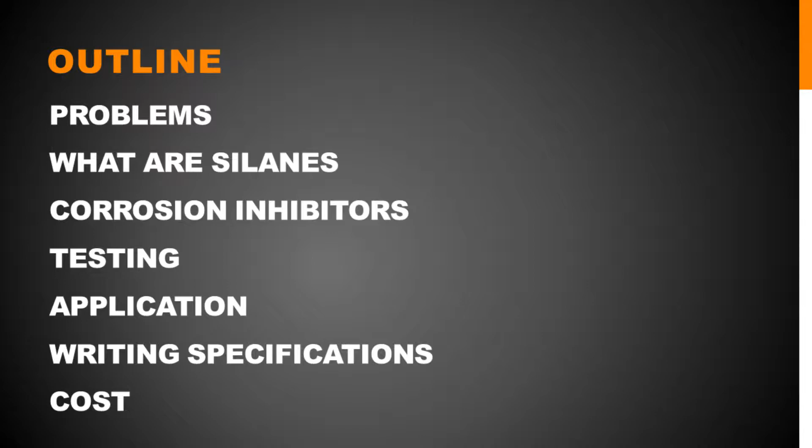What we're going to talk about is the problems, which is typically water. We're going to go a little bit over what silanes are, a little bit in the chemistry of them, a little bit about the difference between them. We've already covered corrosion inhibitors just a second ago. It was great. We'll talk about the testing and how long these have been tested. They're still today being tested. Application techniques, writing specifications, and then the cost.

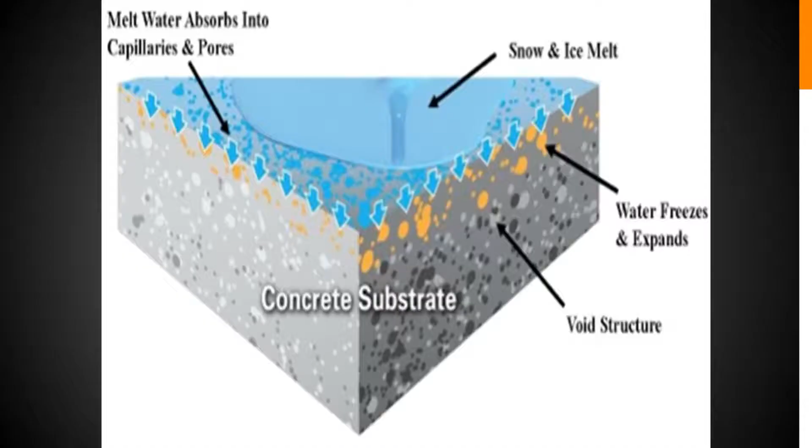Water's a real enemy here. You put chlorides on your bridge decks, then it rains, and then the chlorides soak into the concrete, your rebar starts corroding, and we've been talking about that all day long about corrosion and rebar. So if we can keep the water out of the concrete, we protect that rebar. So a lot of these things you see every day, freeze-thaw damage, spalling, scaling, cracking, ASR. Is ASR a problem out here in the West?

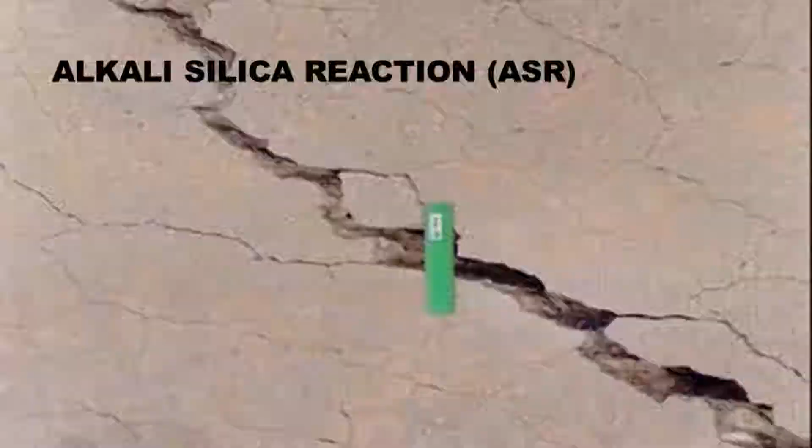Kind of? Okay. ASR, I know one of the projects in Arkansas a few years ago, the runway at Fayetteville, they kept pushing the asphalt at the end of the runway. And so they kept trying to figure out what was going on. So the runway, when it was poured, was 3,000 feet. A few years later, it was 3,005 feet. Well, at the same time, Arkansas had poured 28 miles of interstate with that same pour. It was a real problem. So they put silane on that entire roadway to mitigate that problem. So if you don't have ASR problems, thank goodness for that.

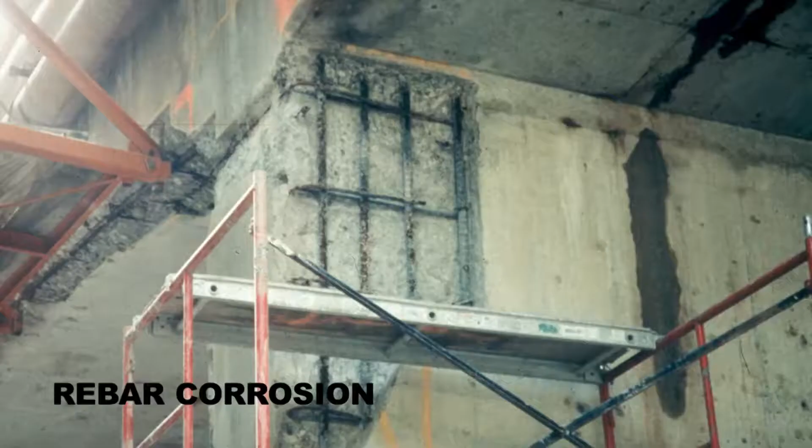This is what I see when I go around the country a lot. The decks, we do a lot of work on the decks. It's the glamour. But then when you get to the substructure, this is what I see everywhere. Does this look familiar to anybody? Yeah. This could be easily prevented by using silane on the substructures. We spend all this time on bridge decks and neglect the substructures, and this is a problem. I mean, it's a problem in Oklahoma.

It's a problem in New York and Maine. I see it everywhere I travel, the substructures not being treated, not being taken care of, and now you got rebar sticking out of there. And now you got to fix it when it could have been easily prevented. I like to see maintenance crews do these kinds of things. Silanes are one of those things that maintenance crews can do quite easily.

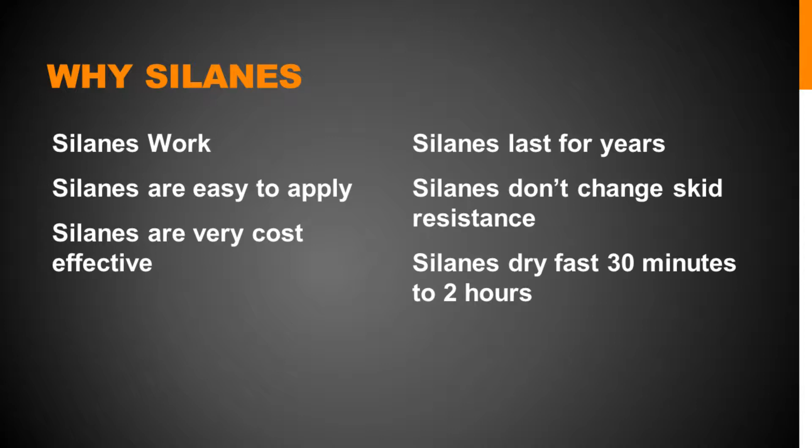Why silanes? They work. They're super easy to apply. You're going to see in a minute that it's extremely cost effective. They last for years. I'm going to go through that Oklahoma State study that we talked about. It doesn't change the skid resistance, and they dry fast. Some silanes will dry in 30 minutes to 2 hours. So it just depends on how you write your specifications, what you allow in there, what the dry times of those are.

From hydrophilic to hydrophobic. Concrete loves water, right? It'll drink it in. If you've been out by my booth, you see a waterfall out there, and you just see that piece of concrete soaking in that water. And so they soak it in. So if there's chlorides on there, it's going in. It has nowhere to go. Silanes, as Atris talked about, form that covalent bond with the silica in there.

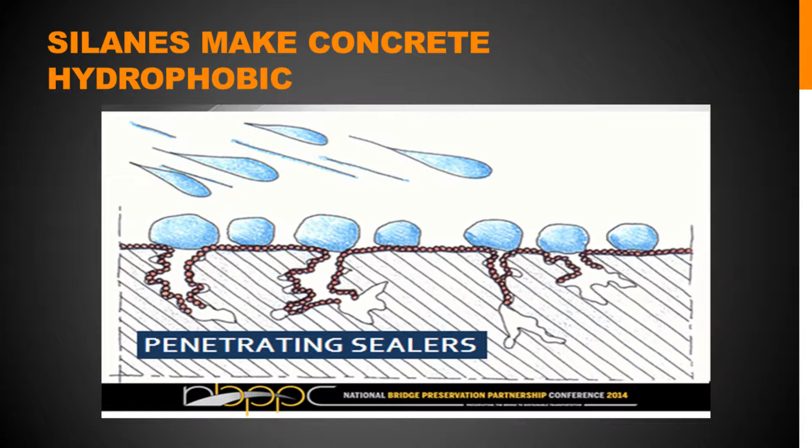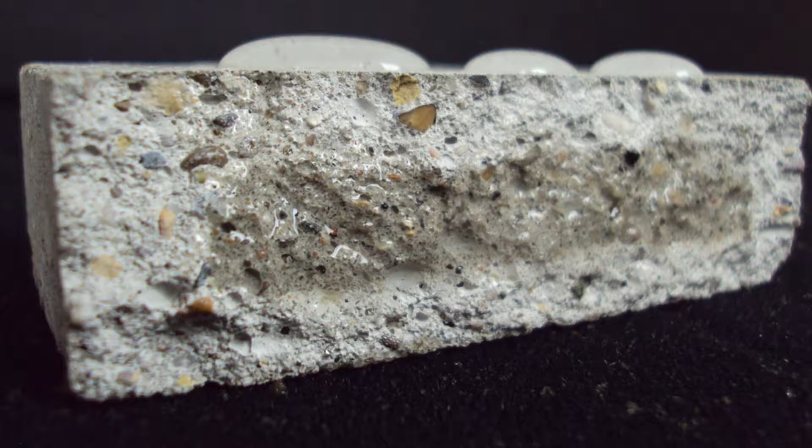It makes them hydrophobic. This is loose sand. That demo is out there. You can take loose sand, coat it and saturate it with silane, let it dry out, and the water will not penetrate through there. This kind of shows you that depth of penetration that you get with silanes. This block was dipped in silane, and you can just see that the water just stays out of there. It cannot penetrate through there.

Talk a little bit about the difference, not to talk a whole lot about the chemistry of these, but typically there's about six silanes that are commonly sold into this industry. These all have great names, but typically there's isobutyls. This is that first word there. So there's isobutyls, N-octyls, and isooctyls. And then you have trimethoxy and triethoxy after that.

All these silanes perform basically the same. They all penetrate the concrete. They all make it hydrophobic. The biggest difference in all these silanes is the dry time. So when someone comes up and says, my silane is better than your silane, that's just not the case. It's kind of like the spread rate, which we're going to talk about in a few minutes.

So the isobutyls are the fastest drying silanes out there. They dry the fastest. Then the N-octyls are the next fastest, and then the isooctyls. So under the isobutyls, the trimethoxy is the fastest silane out there. The isobutyl triethoxy is the next fastest.

To me, speed, I spent a whole lot of my life watching paint dry. Getting on a bridge and getting off that bridge is ultimately important because everybody likes to see their bridge closed for hours, correct? Yeah, no. So the whole deal is to get on there. So if you develop a silane program, I like to see faster dry silanes put in that spec just because you need to get on and off that bridge in a timely manner.

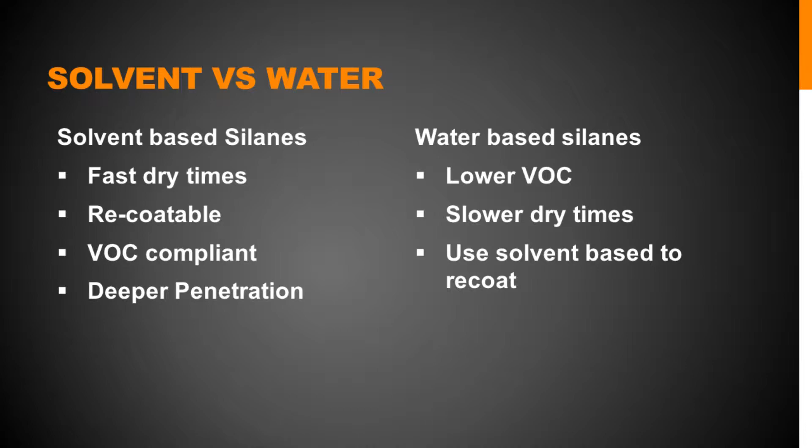And they're deeper penetration. When you're dealing with water-based, you can get lower VOCs, but now we're waiting for water to evaporate. The water's got to evaporate before that silane can really start penetrating in there, and they just don't get as deep penetration.

Silanes have been tested by everybody. Oklahoma started a silane study in 1976. They did the first bridge in the United States in 1977, which was the Bird Creek Bridge. All these DOTs are constantly testing it. Same with universities. Purdue University is doing a study. Nevada University did a study, and it's on the website now. I sent silanes to Kansas City last year. Because you apply it and then you can't see it, is it really there? Does it really work? It's a constant study.

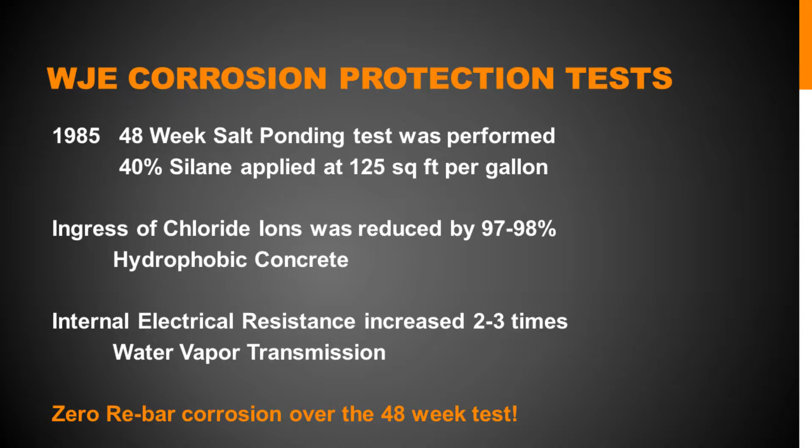This is a 1985 report from Wiss, Janney, Elstner. It looks like it was typed on an IBM Selectric typewriter. A 48-week corrosion study, and a 40% silane at 125 square feet per gallon passed the chloride intrusion test. They've been around a long time. It's a proven technology.

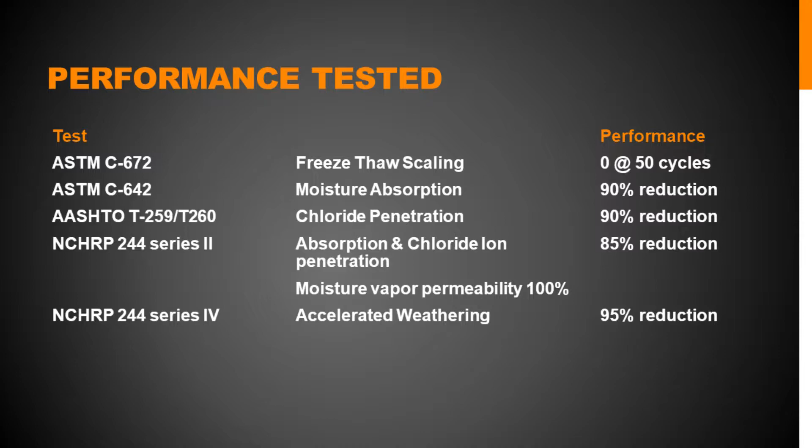So this is a way to test moisture absorption into concrete. Typically not done on bridge decks, but it's done all the time on vertical buildings and parking garages. So you putty this RILEM tube down, you fill it with water, and it determines how fast the water gets soaked in. You run this test on your structure prior to applying a silane. You let it cure for a few weeks, then you go back and rerun that test, and you can see the difference and monitor how much moisture is actually taken in.

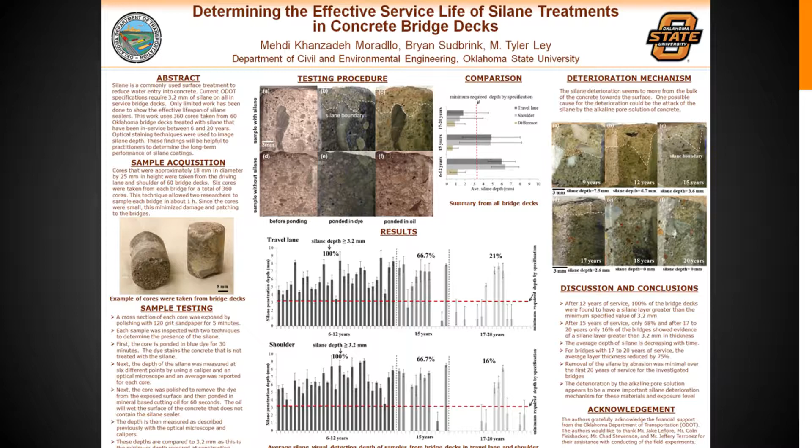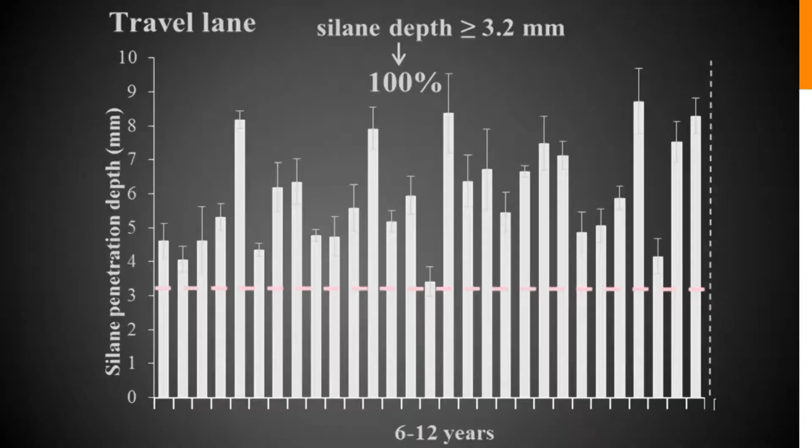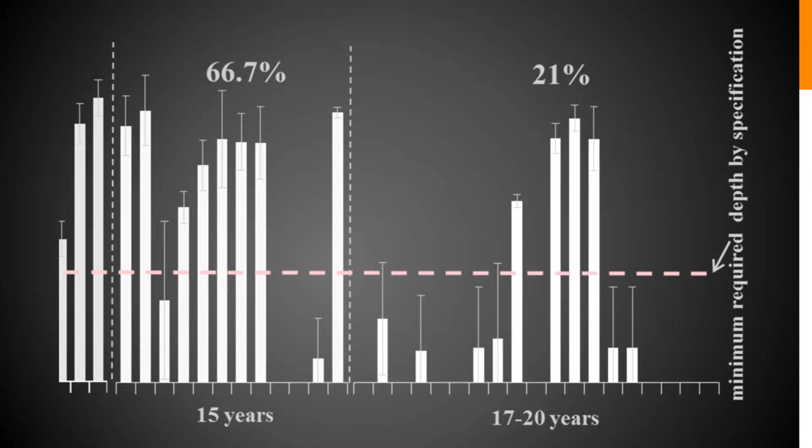So Oklahoma State University tested 60 bridges. They pulled cores from 60 bridges to do this study. And out of those bridges that were 6 to 12 years, 100% of them still showed silane in them. Bridges that were 15 years, 66% of them still showed the presence of silane, and bridges 17 to 20 years, 21%.

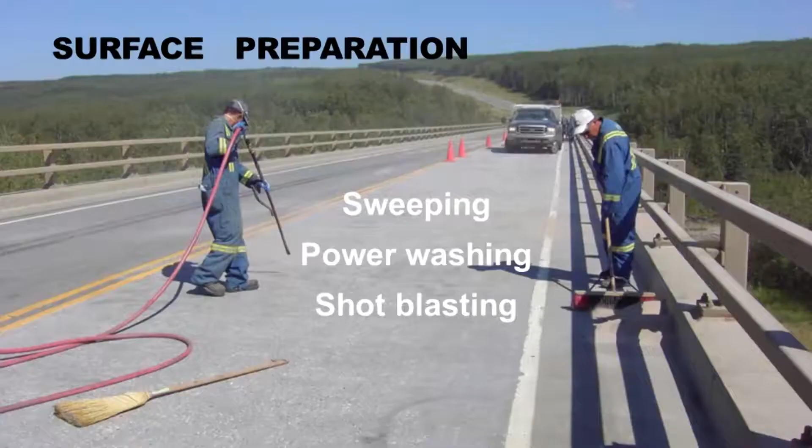So when someone asks how long do silanes last, according to Oklahoma State University, they last 6 to 12 years. So you can typically think that they're going to be in there for a good 10 years after you apply it. Talk a little bit about surface preparation and application techniques, because this, to me, is what's important for the people in this room about, okay, we're going to start a silane program. What does that look like?

A lot of states sweep their bridges. A lot of them just blow them off with an air knife. You can power wash them. If you have a washing and sealing type program, which a lot of states do now, they wash the bridges, but now you've got to wait a day or 2 days before you go back to treat them. The concrete needs to be dry to get maximum penetration.

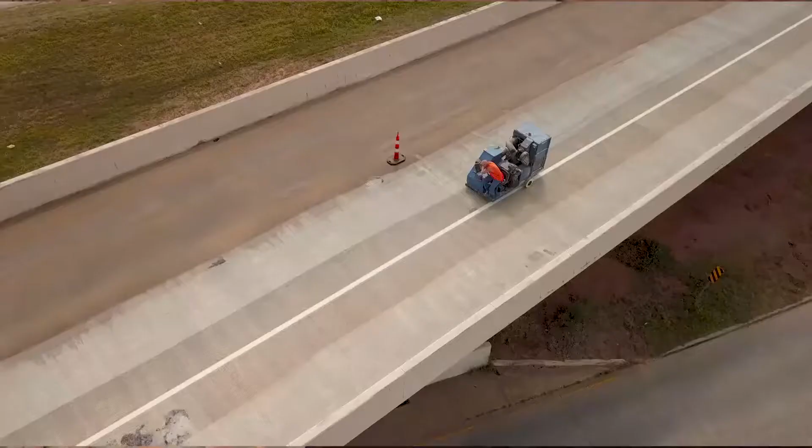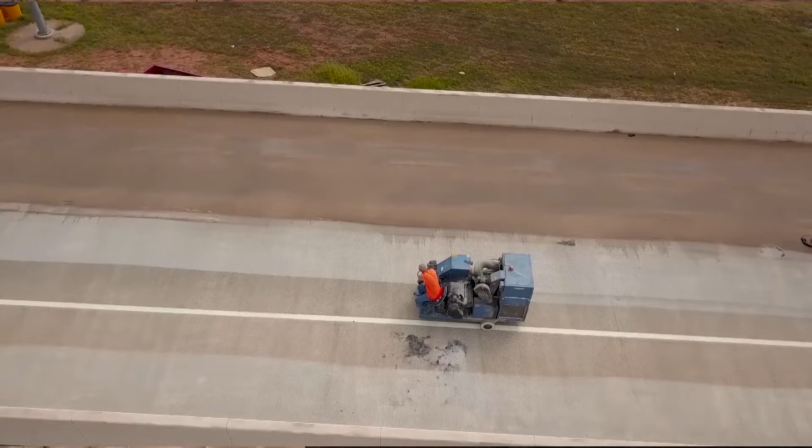So you can just see how clean that shot blaster gets it. It's not a super heavy, it's just a real light. It's more than a brush blast, but you definitely can remove everything out of that concrete. But Oklahoma is the only people that I know that does this. And Oklahoma is the only people that I know that core their bridges to pay their contractors.

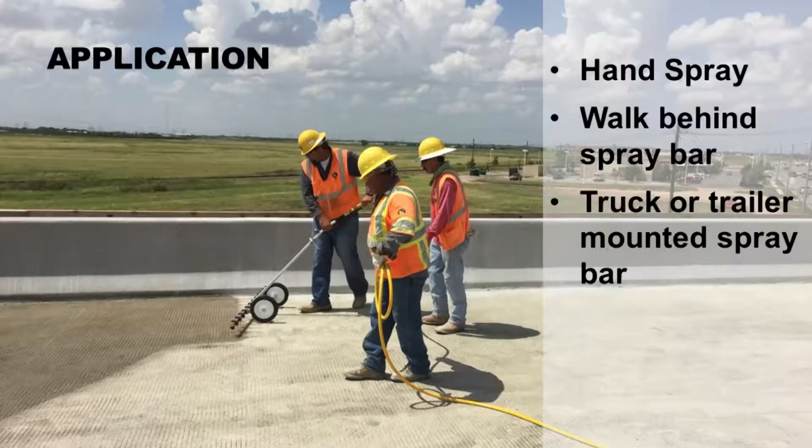Oklahoma pays their contractors two ways. They do visual inspection, which we put a dye in there, and then they can see what that looks like. Then the inspectors can tell that it's been sprayed, the fugitive dye, or they pull a core, and the contractor gets paid on depth of penetration and running a moisture absorption test. It's a tough test.

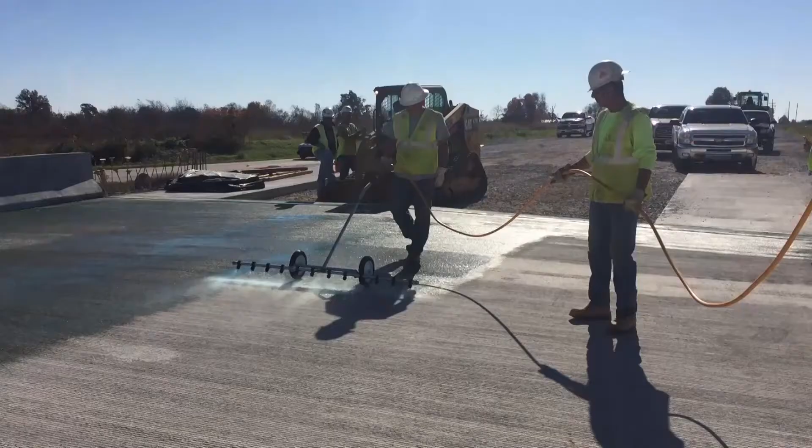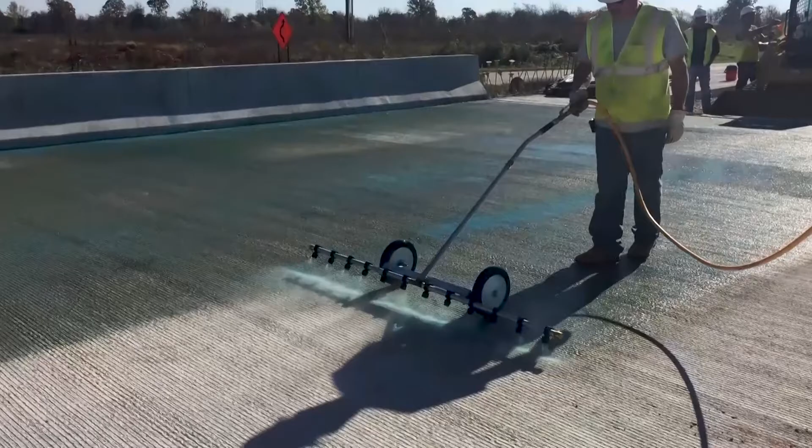As far as applying the silanes, I have a lot of states where contractors just hand spray it, walk behind spray bars, or truck or trailer mounted. The key to this is getting it close to the ground. You can see with this, they're kind of pushing that puddle. This is in Arkansas. This has the blue dye in there. They're applying this at 125 square feet per gallon. It's kind of pushing that puddle.

I like spray bars because it doesn't atomize. You do not want to atomize these. If you get too high a pressure of spray and you're atomizing these silanes, it's good for the silane manufacturer, not good for you. You're trying to get as much transfer efficiency as you can. So when that spray bar is that close to the ground, there's not much waste. This is a truck mounted unit. This is from Illinois. This is pretty close to the ground.

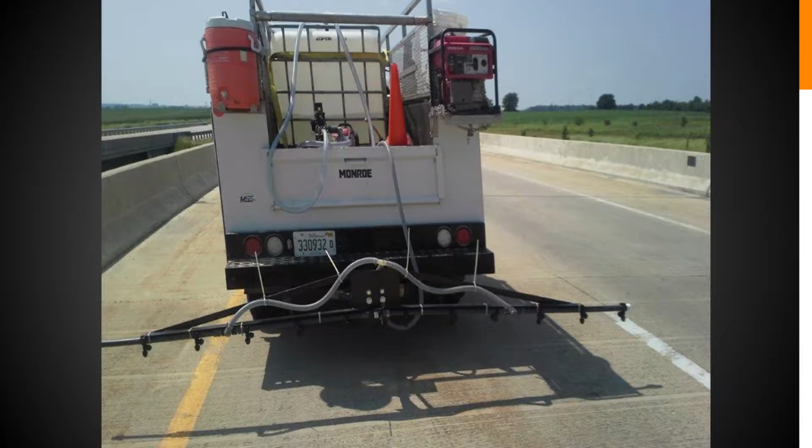Part of the problem with truck mounted units is if you're applying this at, say, 200 square feet per gallon, driving slow enough becomes a real issue. How do you drive it slow? If you're doing huge bridges, it's a great way to do it.

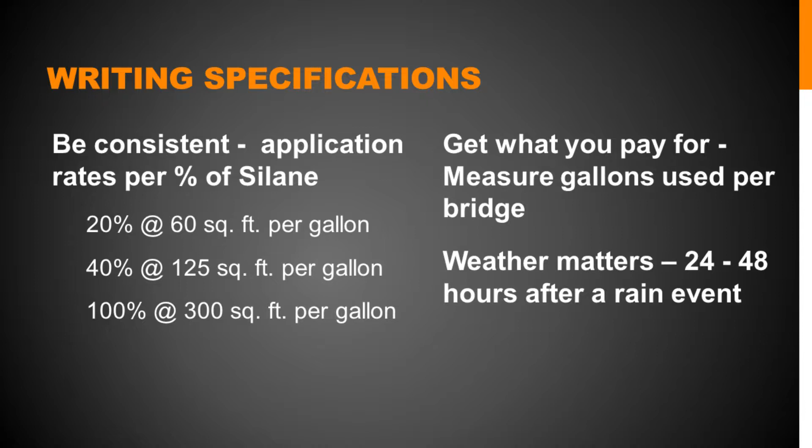Let's talk about writing a specification. Typically silanes, when we were talking about all those ASTM tests, those are typically run, let's say, on a 40% silane. Typically we like to see that written at 100 or 125 square feet per gallon. That gives you 11 grams of silane per square foot. That's about where the silanes need to be effective to keep the chlorides out.

So when you're writing a specification, if you're going to put a 20% silane in there, it needs to be at 60 square feet per gallon to get that 11 grams of silane per square foot. If you're going to write a 40% silane, it needs to be at 125 square feet per gallon, and 100% silanes need to be at 300 square feet per gallon. That's where you need to be.

A lot of times a specification will get written, manufacturer's recommended application rate. Guess what happens? My silane will go 600 square feet per gallon. And it will. But you don't get the protection that you need. That's what happens when we write specifications that say at manufacturer's recommended application rate. You don't get what you pay for. They're going to stretch it out. It happens every day all over this country.

If you ask me to come help you write a spec, this is how it'll be written. We're going to say, if you're going to use 100% silanes, we're going to put them down at 200 or 300 square feet per gallon. And that way you get what you pay for. And then when your inspectors are out there, they're going to say, this bridge deck is so big, this many gallons need to be put down. I want to see it out of that drum or out of that tote tank. I want to see that many gallons put on my bridge deck because that's what I paid for. So be consistent in writing specs.

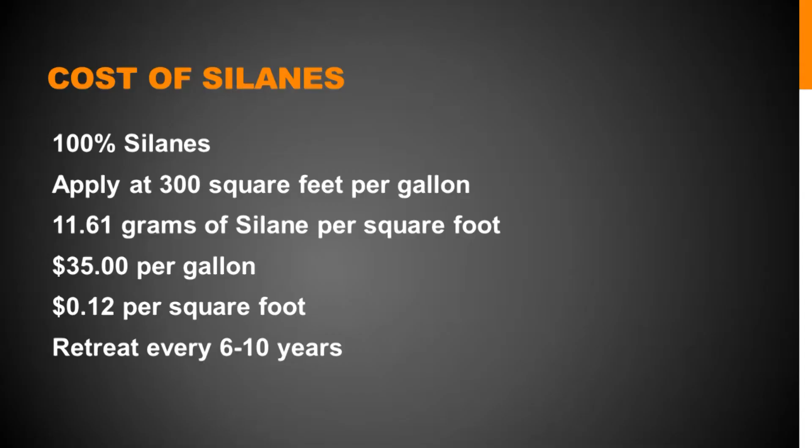40% silanes, 125 square feet per gallon, $20 a gallon. You're at 16 cents a foot. Here's the moneymaker for you guys. 100% silanes at 300 square feet gives us 11 grams. Now you're down to 12 cents a foot cost. 12 cents a foot to prevent corrosion. Pretty inexpensive. Now the question should be, why is it getting cheaper as that silane goes up?

Every time that we have to touch that in manufacturing, that cost goes up. So the 100% silanes are basically the raw material for making the 40s and the 20s. We have to take it out of those tote tanks or out of the container. We have to blend expensive solvents in there. Then we have to re-QC it. Then we have to repackage it. So that's just that many more people that have to touch that. And with that application rate, you're basically paying to ship solvent across the country. So that's why the best bang for your buck is to go to 100% silanes.

Let's look at a typical bridge. So if you've got a 150 by 38 foot bridge, it costs you $140 a square foot.

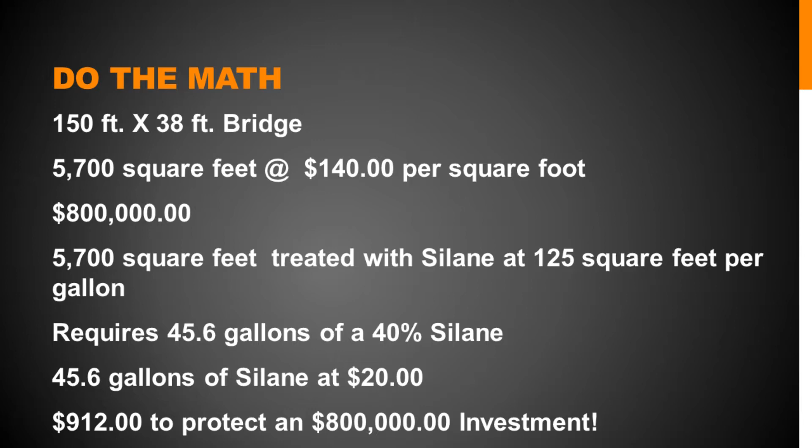When I wrote this, that was probably a pretty good number. It's probably higher than that today. That bridge costs you $800,000 to build. So 5,700 square feet treated with a 40% silane, 45 gallons. So that 45 gallons at $20, $912 to protect an $800,000 investment.

If you had an $800,000 car, would you change the oil in it? Even if it cost you $900? The answer is yeah. You probably would, because you want to protect that investment. Silanes are one of those things that truly protects your investment when you're building these new bridges. It's too easy to apply. It's too easy to use to not do it.

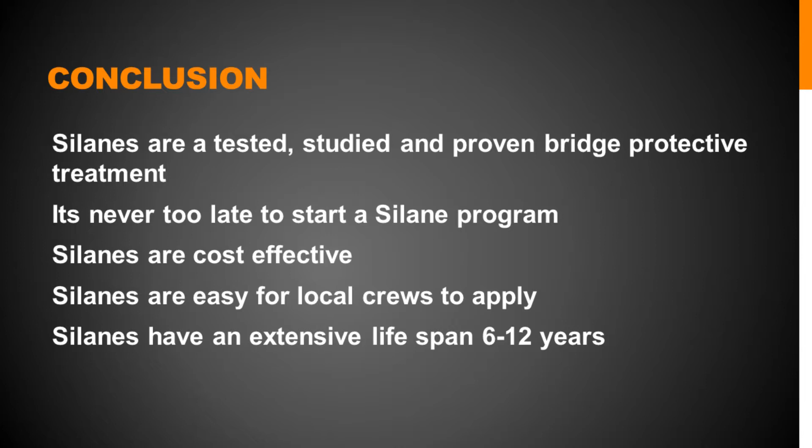They're tested. They've been studied. There's still studies going on this day to prove it. It's never too late to start a silane program. You just saw what the corrosion inhibitors do for reducing rebar corrosion. So it's never too late. If you can keep the water out, those chlorides aren't going anywhere.

Questions? You had mentioned that faster is better for getting off the bridge deck. Does that also correlate to less penetration, though? No, it does not. The question was, does that correlate to less penetration? The answer is no. They're just going to penetrate in there. Sometimes the faster dry silanes cost more, and that's typically the deal. The slower dry silanes, those octyls and isooctyls, a lot of times are less expensive.

Like Indiana, they sprayed right over the top of the striping? Right over the top of the striping. Right. Here's what happens to the striping. Typically, it can soften that stripe for a few minutes or a few hours, depending on the dry time of that silane, but that striping paint will reharden.

Faster is partly because it's absorbing faster, so it doesn't necessarily correlate to less penetration. Often it correlates to more penetration. It's a smaller molecule. Right, basically, that's why the isobutyl is a smaller molecule than the isooctyl is. So typically the penetration levels on all of them, it's not like one's going to go an inch and one's going to go a half inch. We're not talking that kind of dramatic difference.